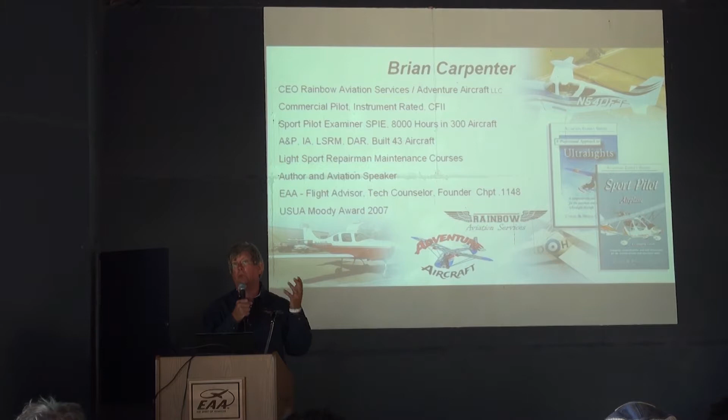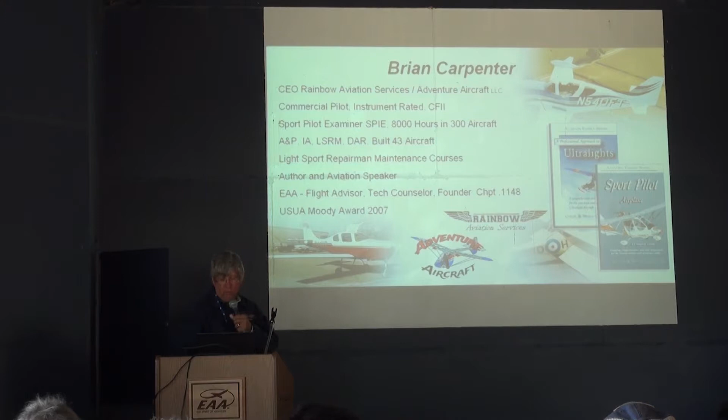We're the company that produces the light sport repairman maintenance classes around the country, with over 4,000 students now having attended that. My wife and I are both authors and aviation speakers, and we talk throughout the country at different events. I'm an EAA flight advisor, tech counselor, and founder of Chapter 1148 in Corning, California, where our home base is. We've been long time involved with EAA, and do everything we can to support them. You may have seen the EAA home builder tips, which I try to participate in as much as I can, and we'll be doing some more of those here if I have any voice left at the end of the show. We're the winners of the USUA Moody Award in 2007 for excellence in ultralights and light sport aircraft.

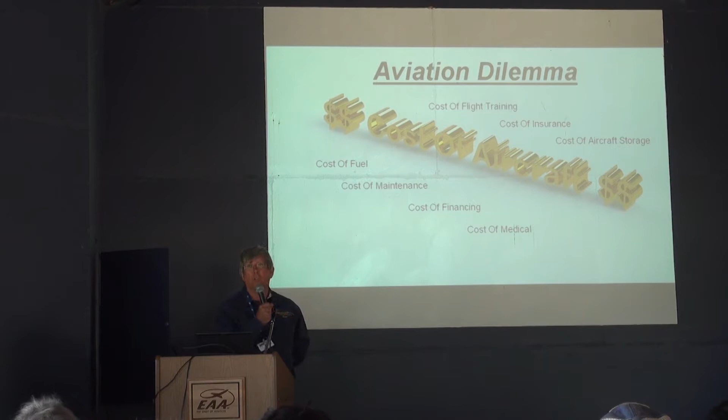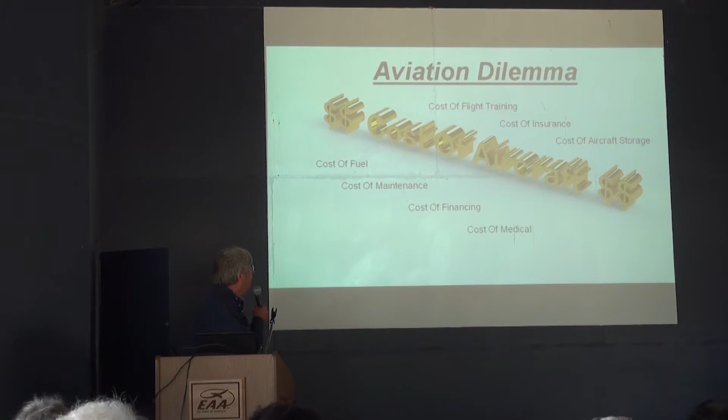So the talk I'm going to talk to you today about is the dilemma that we have in aviation. It seems to be this recurring dilemma, but it's getting worse and worse as time goes on. The cost is getting to the point where it's really almost unattainable for so many people. We have the cost of flight training, cost of insurance, cost of storing an aircraft, cost of fuel, cost of maintenance, cost of financing, cost of retaining your medical, and of course the cost of the aircraft is one of the bigger elements we see all the time.

One of my favorite airplanes here in the whole world, if I could have a light sport airplane of my choice, I'd choose the little Tecnam here. I think it's just one of the most delightful little light sport airplanes we can fly out there. But for most of us, we've decided that $172,500 is not exactly an entry-level price. That's really what we're seeing out there in the industry, is the prices on most of these light sport aircraft are well over $100K. That is not a starting level for most of the people in the world that are trying to get into flying.

And so we've looked at really what we need to do to invigorate aviation, and that invigoration of aviation requires that we have more people involved with that. And if the price of all of these things becomes intangible, they simply don't participate anymore. They just sit on the sidelines and watch everybody else do that.

So when we started down this path of trying to idealize what we think is necessary in order to get more people involved with aviation, we came up with these criteria that we have right here. Now remember, we're not intending to solve all the problems in aviation here, but rather one of the problems, and that's entry-level aviation. So we've thought about this a long time, and we've come up with these 9 items that we think are the most important.

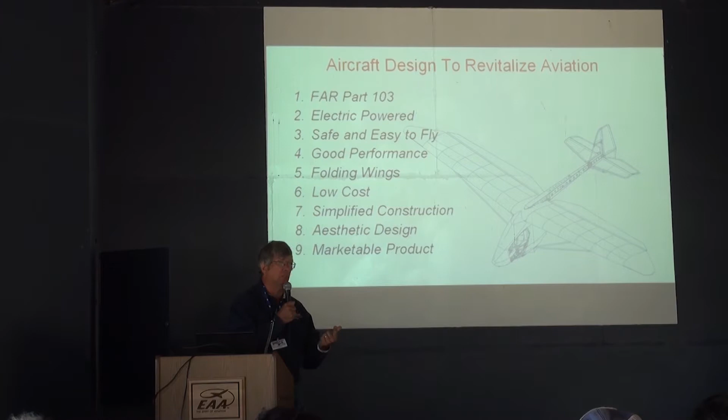First one is that we think revitalizing Part 103 and having just a very basic entry-level way to get involved with aviation, without all of that cost of a check ride and extensive flight training. If all you want to do is go fly around the patch, it really seems, as a student pilot, ridiculous that you need to be learning about ADS-B and how to fly in and out of Class B airspace in San Francisco International. It just doesn't correlate for the average pilot. He simply wants to get out there and fly.

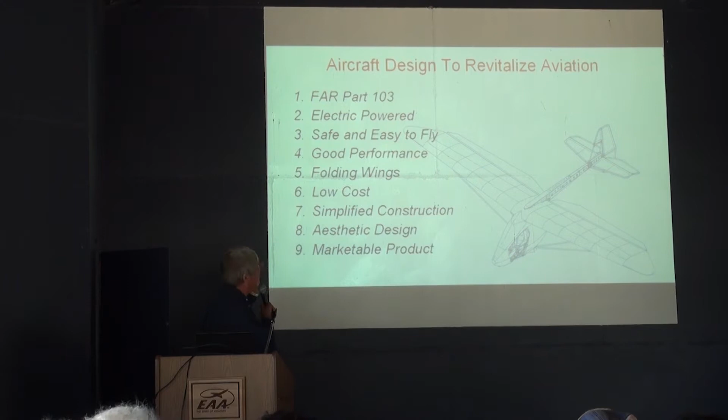Most pilots that start off in Part 103 ultralights eventually end up moving up to sport pilot, private pilot, commercial pilot, and so on. I can't tell you how many of my friends that started with me 40 years ago flying these little airplanes are now flying corporate pilots, flying a Learjet or a Citation. It's all a stepping stone. But if we can't get that first step, it's never going to happen. So we believe Part 103 is one of those answers we're looking for.

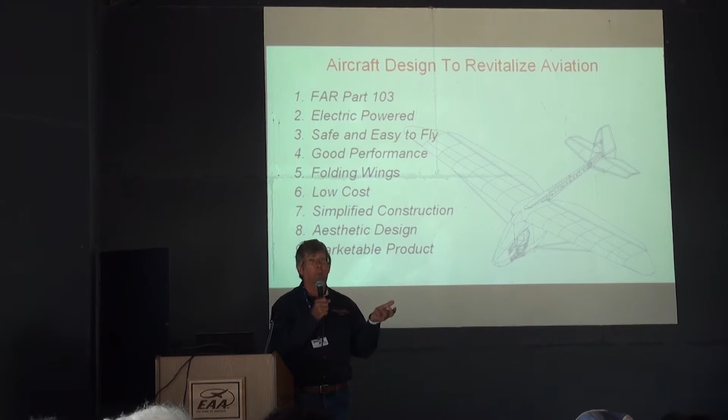We have been looking at this electric power for a long time, and we are truly zealots about this. We have analyzed this inside out. I'll talk a little about where this is now and where it's going. But we believe that in 10 years, especially in the ultralight area, you will see more electric airplanes out there than gas-powered airplanes. We believe we're on the cusp of a significant paradigm shift in how little airplanes are flown.

Safe and easy to fly, good performance, folding wings, low cost, simplified construction, an aesthetic design, and a marketable product. Those are the things that were on our list. I'm going to talk about each one individually.

This was kind of a rendering in the early days of what we thought we were going to have that met all of that criteria.

This is actually a joint venture. Quicksilver Aeronautics, the oldest ultralight company in the world, builds about 20 to 30% of the parts for me. We've been Quicksilver dealers since the very early days, back when we were flying little 15 horsepower Yamaha Quicksilver Model E weight-shift airplanes. We go back with Quicksilver for many, many years.

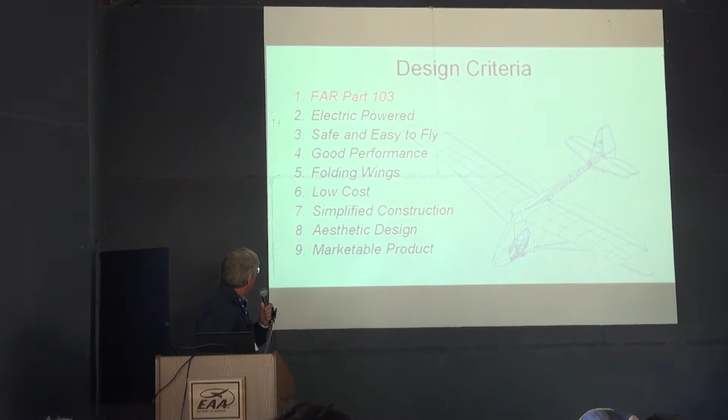So Part 103 — we've decided that's a very important aspect of this. The airplane we have at the show in the ultralight area is a legal Part 103 airplane with a 20 horsepower sustainer motor and 4 battery modules. Without the ballistic parachute, we're exactly at 254 pounds, and with the parachute, a little above that — but that's freebie weight we get on that airplane.

Basic specifications on the airplane: it has a 37-foot wingspan. This was a significant part of the criteria. If the airplane can't fit in a regular 40 by 40 hangar, it would be too much hassle for most people. If you have to fold wings every time you go flying, that becomes unacceptable. So rather than have some high performance glider, we wanted to stick with an airplane that met all of our criteria and could simply fit into a regular 40-foot hangar.

It has 170 square feet of wing area, which gives us a really light wing loading at a 750 pound gross weight, with an aspect ratio of 8.2 and a span loading of 5.5. The span loading is really the criteria that determines whether or not it is a glider.

In electric powered aircraft today, it's not practical to have an electric powered airplane — it is, however, practical to have an electric powered glider. The reason is, if it's an airplane, the FARs say you have to have 30 minutes of reserve fuel on board. Well, that's ridiculous — carrying around 80 pounds of batteries just for that reserve. In a glider, there's no requirement for the 30-minute reserve, so we can use up all the energy stored in the batteries. It's much more practical to go glider at this point, until battery technology catches up to where airplanes really make sense.

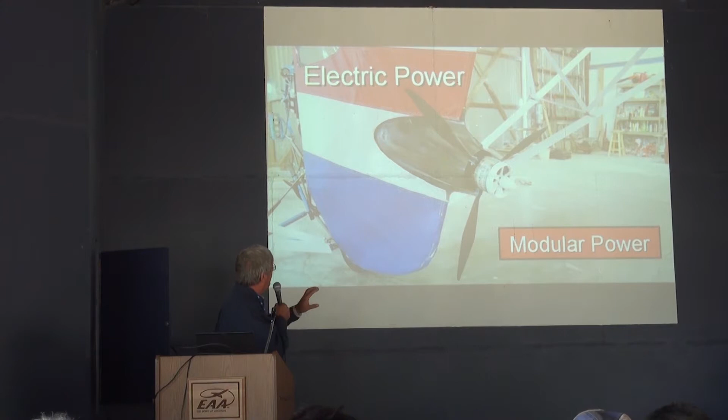Electric power — looking at the future, we can foresee that electric power is going to take over. Right now we're a little simplified: this is a sustainer motor, a Predator 37, a 20 horsepower or 15 kilowatt motor. It puts out 99.3 pounds of static thrust as it sits there. To sustain flight, we carry about 65% power without overheating the motor, in order to maintain level flight.

That's where we are with that motor right today. It's not a self-launcher motor - that would be one of the next versions of the airplanes. Right now we have 3 airplanes: the prototype at the airport that all the flights have been done on, and then production prototype number 2 and number 3. Number 3 is at the show also, and those are getting different versions of different motor power plant packages as we speak.

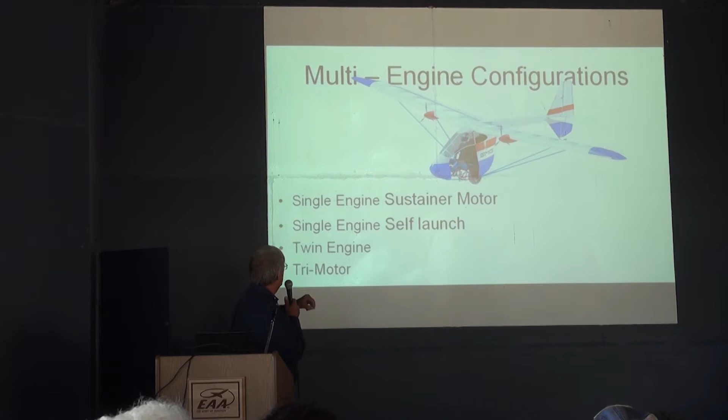The next generation we're looking at is an airplane actually built as a twin engine, a tri-motor, a single engine, or as a pure glider. It can fly in any one of those three categories, and it was designed so that all of the power plant systems are modular. We've recognized that the advancements in technology around electric power right now are changing so rapidly.

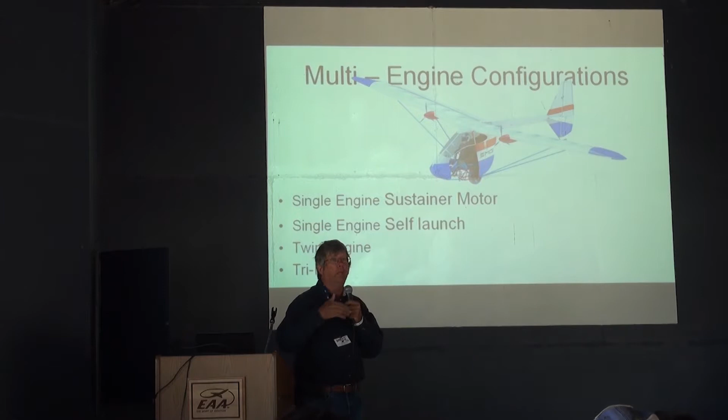It'll be like your laptop - the minute you put down your credit card for your new laptop, they've just put out a new one that's better. It's constantly evolving. We've made the airplane from the beginning able to leverage all this new technology, making it very simple to pull off the old version and put on the newest one. So we expect this to be a modular, changing, evolving system for the next 10 years on a regular basis.

There will be some power plant systems that rise to the top, better than others, kind of like what Rotax has done in the industry. Rotax right now in the light sport industry holds about 85% of the market share. That means 15% is shared by all the other engine manufacturers - Continental, Lycoming, Jabiru, HKS - they all share that 15%.

Rotax, because it got out early and became part of this process, has now absorbed the entire community. It has the best product and can continue to evolve and get better at a faster pace because of its market share. We'll probably see a couple of electric motor developers do that as well.

Here is the Nova 15 and the Nova 30. The Nova 30 is the self-launch motor we'll be using on prototype number 3, the production prototype. It's a 30 kilowatt, or 40 horsepower, engine operating at about 93% efficiency. To give you an example of where we are in the industry right now - 40 horsepower motor, the Nova 30.

The equivalent in a gas-powered engine would be the Rotax 447, also a 40 horsepower engine. This has a third more torque. The Rotax 447 with a gearbox and electric starter weighs 93 pounds. That motor right there weighs 11 pounds. By the time we add cooler, ESC, and all that stuff, we're at 20 pounds - leaving 70 pounds of batteries before I even get to zero fuel weight on the gas motor.

So the advantage we have in electric power: rather than the best gas engines out there, where we're at 1 horsepower per pound - that's the state-of-the-art with gas engines right now - in electric engine development we're really very close to 4 horsepower per pound. A 4-fold increase in power-to-weight ratio coming out of these engines.

The downside is the batteries, of course. So let's go back to our comparison. If we compare those two engines, we have 70 pounds of batteries before we get to zero fuel weight, and then we add gasoline and more batteries to stay equitable, and we eventually get to equitable flight time. Today, right now, that number happens to be right at 23 minutes. So if you're going to fly shorter than 23 minutes, it far outweighs in favor of the electric motor, because you don't even have any gasoline to fly with - it's very easy.

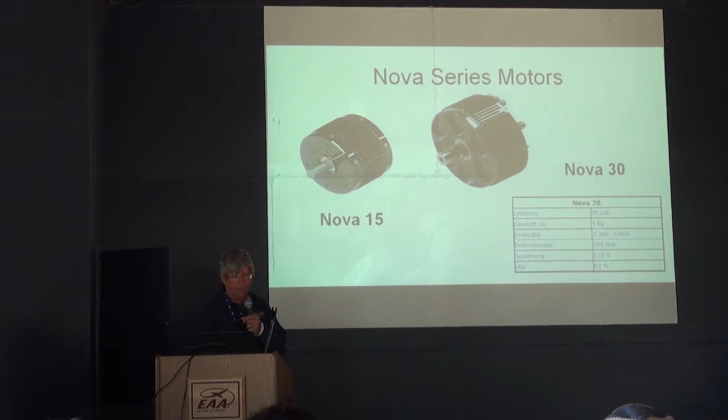When someone says, oh, I want to go fly 3 hours, I just tell them, don't buy this airplane. It's stupid. Right now, 23 minutes is the magic number. We know that you can do better with gasoline for anything more than 23 minutes. If your flight mission is really that you need to go on a 4-hour flight, this is stupid at this point.

As we develop, some of these guys working on this project are really interested in developing some hybrid versions. I've heard some of the craziest stuff in the world - we're going to put a turbine engine in there, driving a generator that charges the batteries, that runs the motors. Okay, let's see what happens. But we really are not interested in being the end source for the motors, controllers, batteries, and all that kind of stuff. We don't have enough volume to do that.

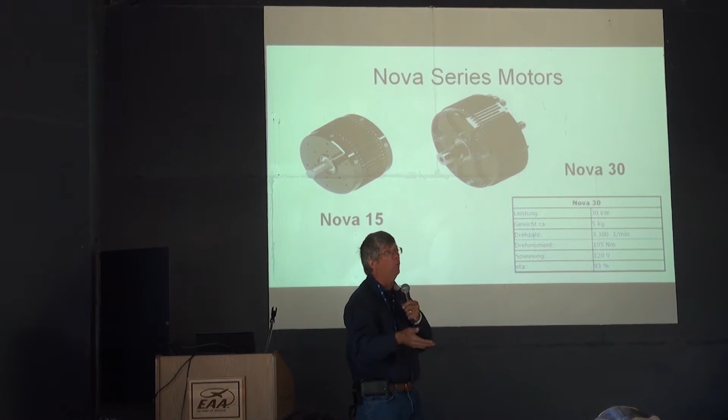We thought it actually was going to be the car industry that was going to drive the battery technology. You know who it turns out is doing more adaptive, innovative research and development towards batteries on the commercialization process? The cordless tool manufacturers. There's just billions of these things being sold around the world. And every Christmas you notice that the battery packs on those drills get smaller and more powerful and last longer. Those guys are really going to town developing that stuff. And I think we will see more and more commercialization. When we get to that point, we'll be able to start leveraging that.

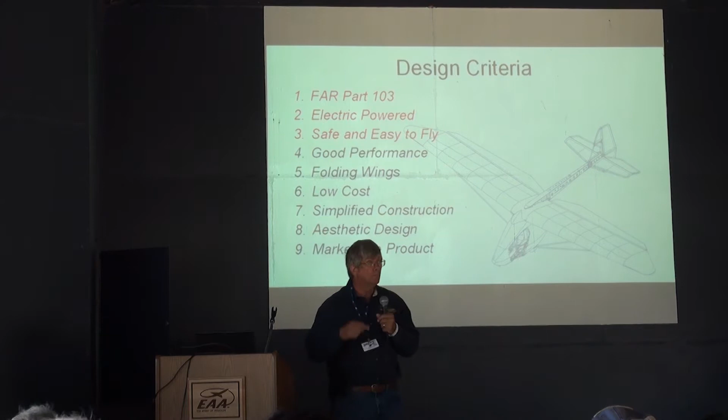Safe and easy to fly. That's never good at an air show. So, safe and easy to fly.

You remember our first criteria is that it had to be Part 103. Part 103 is ultralight, no requirements for pilot's license, no requirements for training, all of that crazy stuff. I grew up in the days when we started training in Part 103 ultralights. It was a transition from power, basically hang gliders that got power, and in the early days there was no such thing as a two-place airplane.

So what we did is we'd get an old Quicksilver Model E weight shift, give them a couple hours of ground school, put them in the airplane and send them off. If they came back, they were a pilot. If they didn't come back, we got a new student. That was kind of how the system worked.

Well, that's really not an acceptable method by which to transition pilots into ultralight aircraft. So one of the criteria on the airplane is that it had to be a really easy to fly, safe airplane. As a result, we have to give up some of the high performance—the snap rolls in this airplane are probably going to be kind of wimpy. We're really looking at stability, ease of flight, and safety.

This was test flight number 39, specifically for the purpose of demonstrating the hands-off flight capability of the aircraft. We've got a camera plane flying out in the distance, getting prepped to do some filming.

It's kind of funny because they flew along as I took off, and they're climbing at max rate of climb right now. When we tow, we typically tow at 40 miles an hour, and we can be towing right at 1,500 feet as a routine. Our highest tow rates right now have been 1,800 feet a minute on the tow—very aggressive.

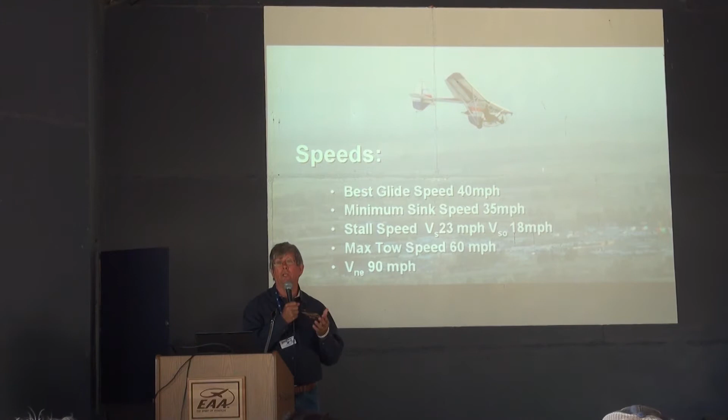Now, at best glide speed, the glide ratio is 13 to 1. The glider guys all say 13 to 1, that's pretty horrible—that's not that great. That's actually right about in the area of an intermediate hang glider.

But what you have to remember is that glide ratio is distance over altitude lost. If you're going somewhere, glide ratio is really, really important. That's why those guys with those fast fiberglass gliders do those long cross countries. Very efficient, real high glide ratios on the thing.

The most important thing for this airplane is not best glide, but rather minimum sink. And we're right at 280 feet minimum sink right now. That's better than the Schweizer 2-33. That's the kind of airplane where you can now thermal really efficiently. And as you saw in the video, the glide is really, really flat on that thing. It's not coming out of the sky very fast.

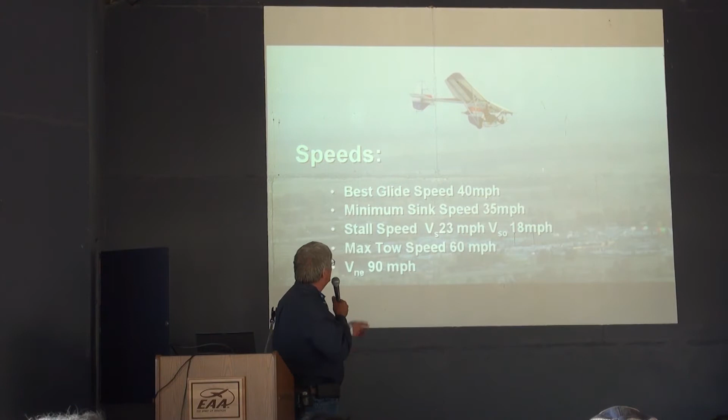And so one of the guys said, well, we really need a higher glide ratio. And he was in the booth talking to me, and I said, well, it's actually 80 to 1. He said, that is not 80 to 1. There's no way to get 80 to 1 out of that. He says, yeah, I do all the time. He says, that will not get 80 to 1. You start to get a little indignant. And I said, I do it all the time. He says, how is that possible? I said, all I do is I reach down with that little thumb switch and start adding a little of that electric power, and the indicator just goes right on up to 80 to 1 as soon as I get that throttle pushed up enough. I can make this thing act like any kind of glider as long as you've got a little supplemental power there to back you up.

And so it was kind of tongue-in-cheek, but the reality is, when we're using this as a glider, just a little bit of power really improves the performance. And so right now, even with our small battery pack, in a sustainer mode with no lift, no thermals, we're still about 20 minutes of flight time in the air.

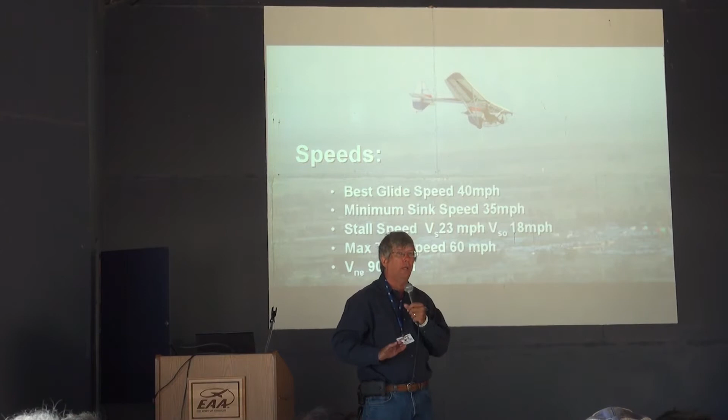That's a long time. So I heard like Malcolm at Wallaby Ranch, where they tow the hang gliders down there. And he was saying really what we need in the industry is we've got all these guys that are towing behind the Moyes Dragonfly. We tow them to 3,000 feet, they catch the thermals, and they fly around for a couple of hours before they come home. But we've got all these old guys, their landing gear are not as good as they were when they were 19 years old, and the thought of landing on your feet at 80 years old just doesn't work for them anymore. If we've got an airplane here with wheels where we can take off on wheels and land on wheels, those old guys that no longer can do the hang glider stuff can participate this with other.

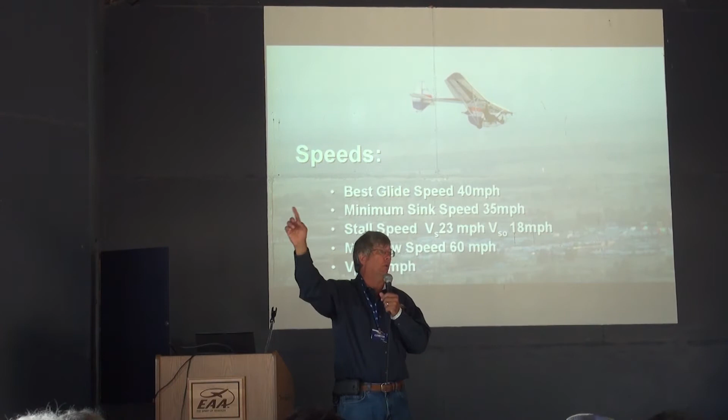And he says, I don't even need 20 minutes, I need 10 minutes worth of flight time on the motor, because we're going to tow them up, they're going to do 2 hours worth of thermaling. All we need is have a little supplemental power that if they get a little short on approach, just add a little power. Or if they're out seeking a thermal a lot further than they should be from the airport, power up and go back to the landing area. So that's their goal. They don't even want to think of the power, the electric power part of the whole thing as part of the equation. It's basically to them a backup system to the flying of the airplane. So many different missions that this aircraft can be in.

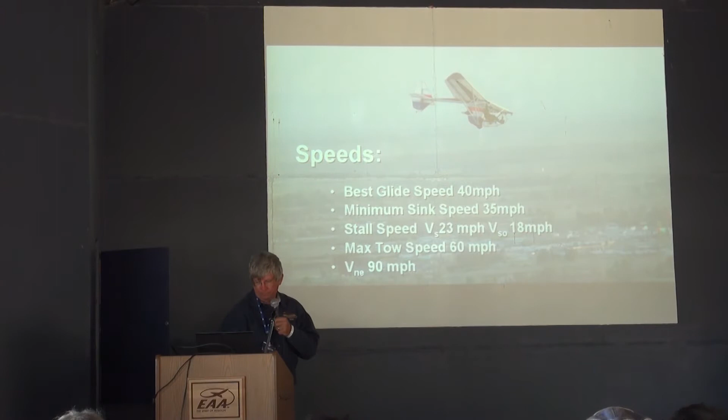So Austin is my shop manager's 14-year-old, and I started having him run the wings. And as you saw in the video, I didn't realize that he was just holding on until I took off and he just let go of me. And so now we're at the point where we realize finally that we don't need any help on the wing runner. As long as there's no wind, just put our feet out and go. So pretty short takeoff and landing distances on this thing if we want to. By the time we're about 10 feet, got total control on the airplane.

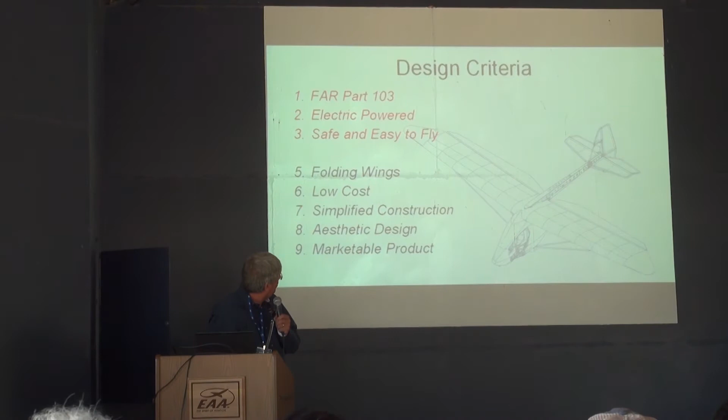Yeah, I talked about the glide ratio and the sink rate.

So are you ready to run, Carl?

On board the aircraft are 3 flight data recorders. We have the Asset Vario, which is basically a handheld variometer that gives us a whole bunch of downloadable data, GPS position, all of that kind of stuff. We have an Eagle Tree flight data recorder that does engine and battery temps, motor temps, and all of that kind of stuff. And then we have an ESC that's doing controller motor temps as well. So we've got 3 sources of data that we're downloading.

Occasionally on the website you will see Daniel, our motor guy—I'll introduce you to him at the end here for questions. He compiles all of our data for us and outputs this stuff, and you can see the actual data plots coming out of the flight data recorders on the airplane.

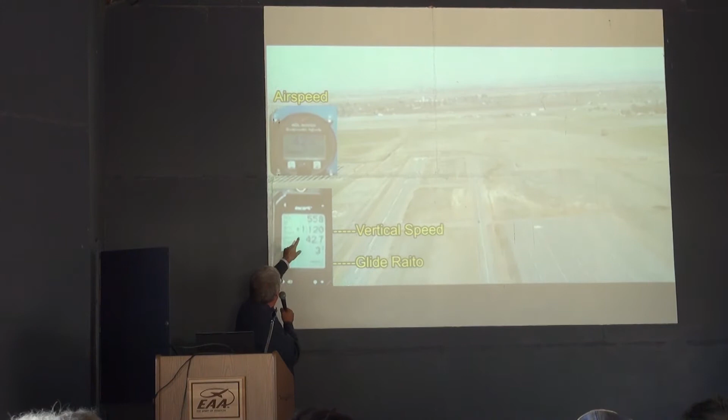So what we've done on this flight is we're showing rate of climb over here. Right now we're about 1,200 feet a minute rate of climb, glide ratio, altitude, GPS tracking position, and then airspeed up there on the left-hand side with digital airspeed. We've got digital airspeed and altitude, actually about 20 functions in those instruments.

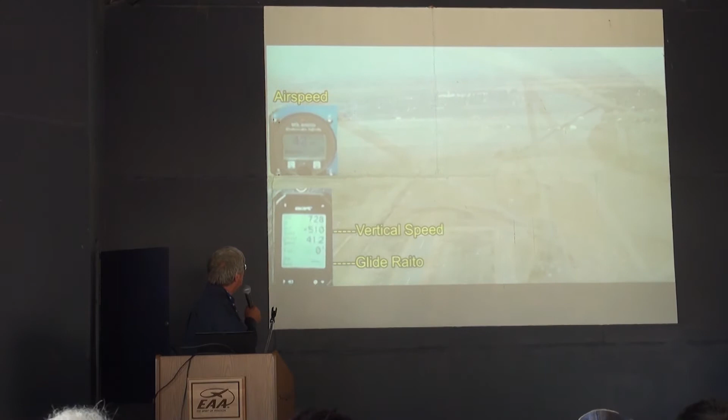So we tow to altitude. On this flight right here, we're 300 feet above sea level, and you can see that we're dropping off right about 890 or so. That's about 600 feet above the ground for that launch right there. So we're at the end of the runway and we cut loose at 600 feet AGL.

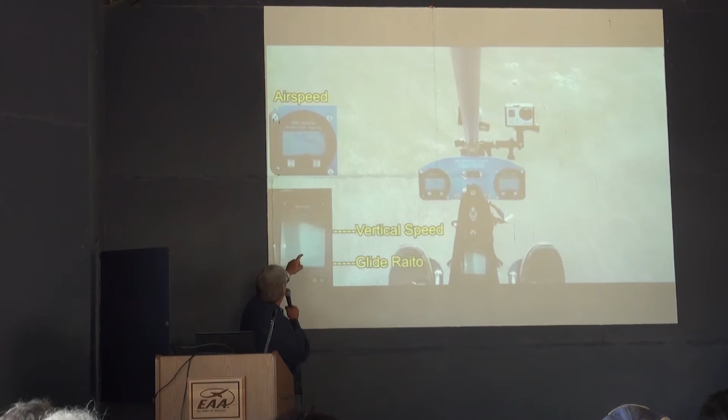Normally that's a pretty short flight for a glider, 600 feet to make a flight around the patch. So you can look, on occasion when the video gets good enough, at the glide ratio right here. This video is on the YouTube channel also, so you can go scrutinize our data that we've got right here, and vertical speed over there.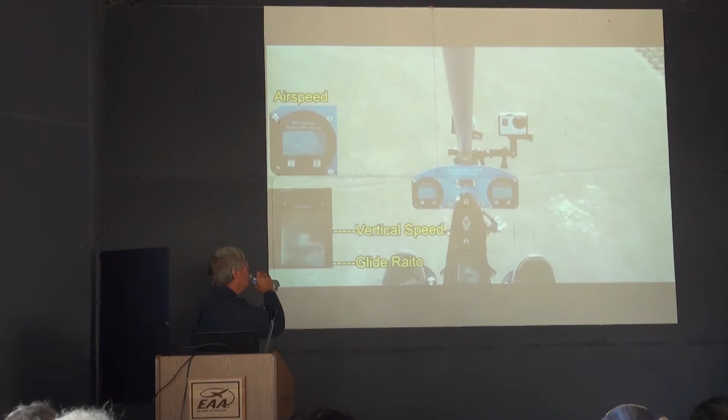So we're able to take off from the end of the runway. We're right now coming alongside of the runway. We will fly down past the end of the runway over the high school, make a 360-degree turn, and land in exactly the same spot that we took off from.

These are all glider tows. The first 50 flights on the airplane were all ground launch, and we didn't do any power stuff until just recently. We've done 5 powered flights so far. Every flight that we've done so far is all flight test program stuff. We've got a very specific series of tests that we're doing, and we're just knocking them out one at a time—a very, very specific program flight test on the thing.

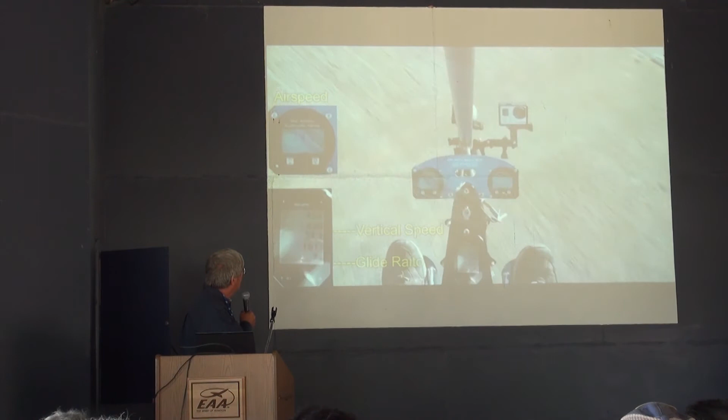Yeah, it doesn't show up too good on this screen right here, but now we're getting ready for the landing, starting to circle down. Very easy to fly, very fun to fly.

On the website we also do a progress log. So we keep you, when we're in the shop, updated pretty closely on a daily basis of what's been happening, all the flight test stuff. We show the bloopers from the screw-ups on the flights and the screw-ups in the shop—pretty much everything that's going on within the shop.

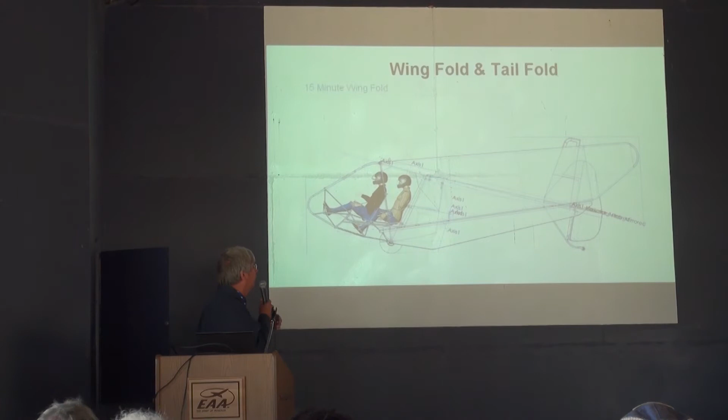Folding wings—the airplane has a very unique folding wing design. It's designed so that the entire package can fold up; the tail folds up, and none of the controls on the tail have to be disconnected to fold—they just simply fold. The wings fold down alongside the airplane. When the airplane is folded, with the wings in the folded position, the total width of the airplane at the widest point, with the exception of the training wheels here, is 33 inches. It's a very, very narrow package.

It will go through a door of a house—through a regular house door in a folded position. That was one of the criteria. The ability to afford an aircraft means I've got to have some place to put this thing. I've got to be able to either slide it in the hangar with my buddy without using up too much of his space, or take it home and put it in my one-car garage. That was one of the criteria right from the very beginning.

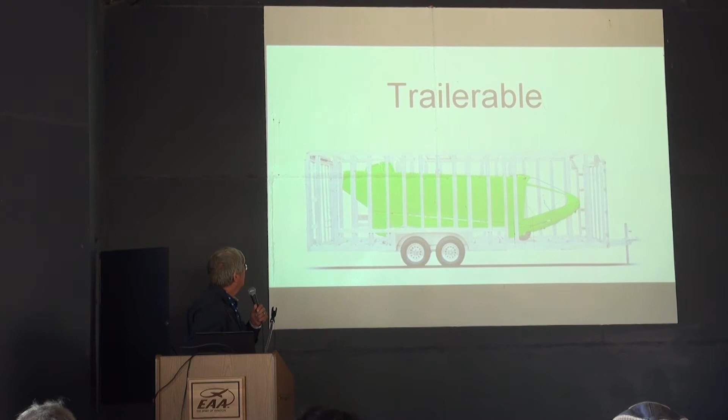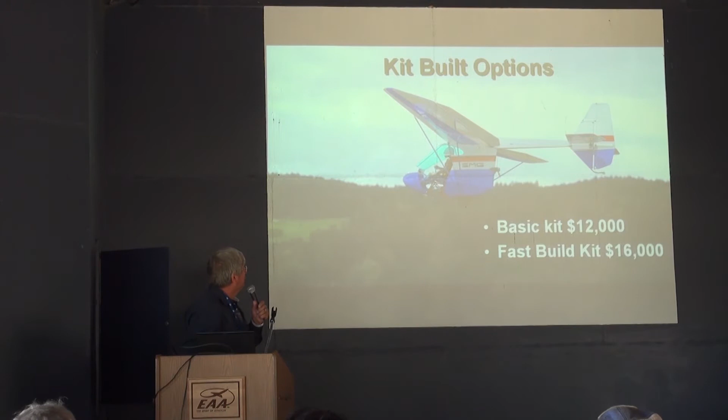We need it to be trailerable. Low cost: the plans-build option we think we can do for less than $10,000. We've got a couple guys that are started on that already. Kit build, $12,000—you've got to do a little welding—and the fast build is basically an erector set at that point. Simplified construction: we've done some amazing things with the construction of this thing. The entire airplane is designed using SolidWorks with full 3D modeling, finite element analysis capability.

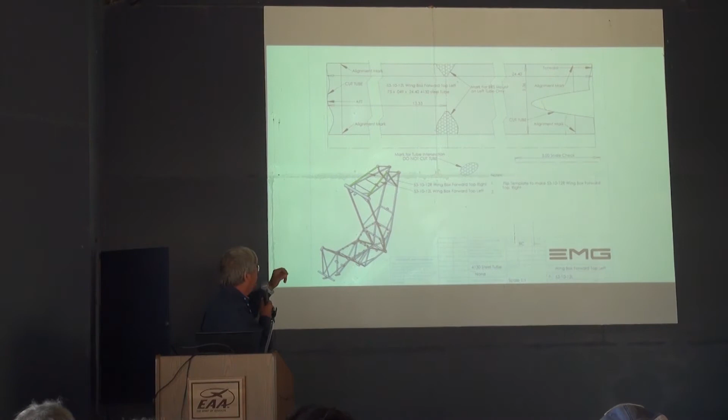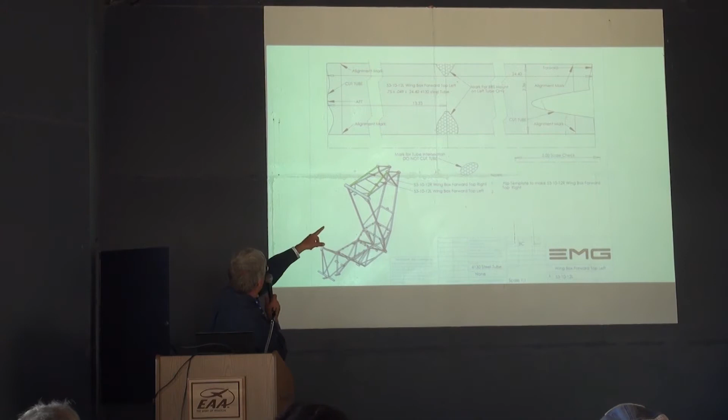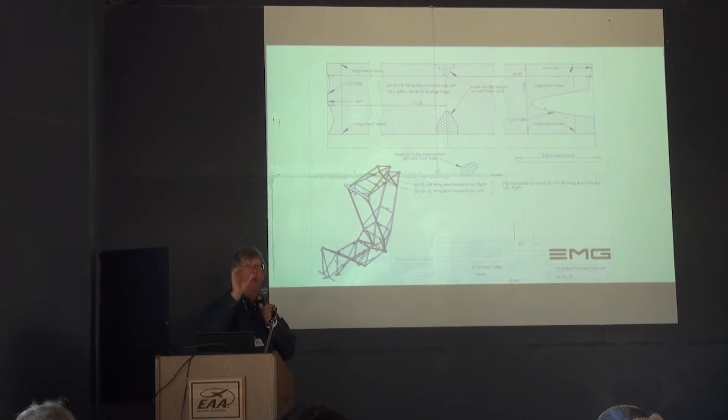Each one of the tubes has a set of plans for a plans-built version that points to the tube. On your home computer, you simply print this out at 100% scale, cut out the template, and cut the tube to length. In this case, the tube is 24.4 inches long. We draw a line down the center of the tube, usually using a U channel to align it perfectly straight with a magic marker. Wrap the tube with the template, slide it to one end, mark it, slide to the other end, mark it, then grind it on the grinder.

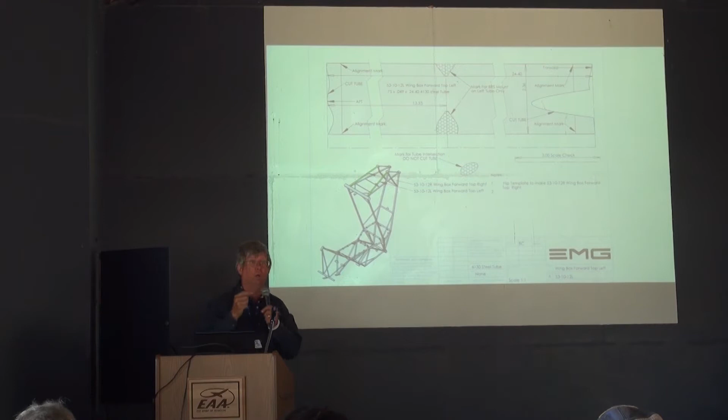It fits the airplane exactly perfect. If you've ever done tube welding, you grind a little, go fit, grind a little, go fit, and by the time you're done and ready to weld, there's this big half-inch gap you're trying to fill with the torch.

This is just amazing. The 3 prototypes we have right now were all built using this system to prove that it works. We even have jigs that can be built to hold all of the frame members in place. Those jigs are actually made out of MDF.

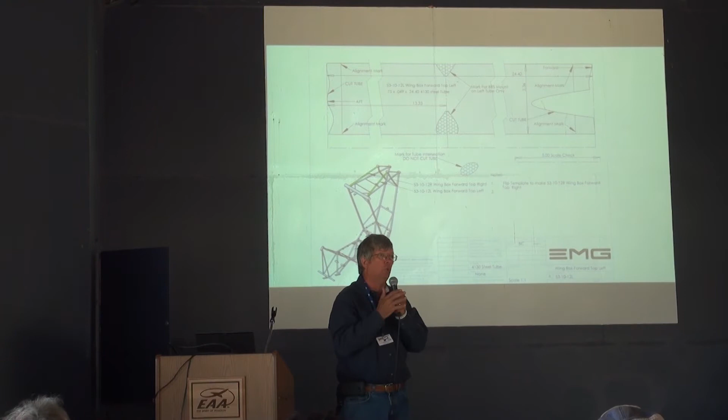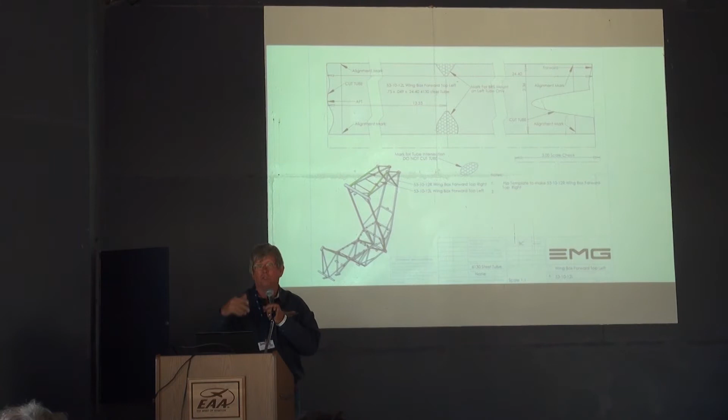We have DXF files that you can take down to your cabinet shop, give them the DXF file and 2 sheets of MDF, and they will cut all the jigs. It usually costs about $200 for a complete set of jigs. The jigs can be used probably about 50 times, so we've got guys who will make all the jigs and then sell them to somebody else for 3/4 of the cost, get their money back, and the next guy can buy them and sell them for 3/4 of the cost, and so on. Make use of many jigs on there.

There's an example of the MDF jigs for the wing box, one of the more complex parts in there.

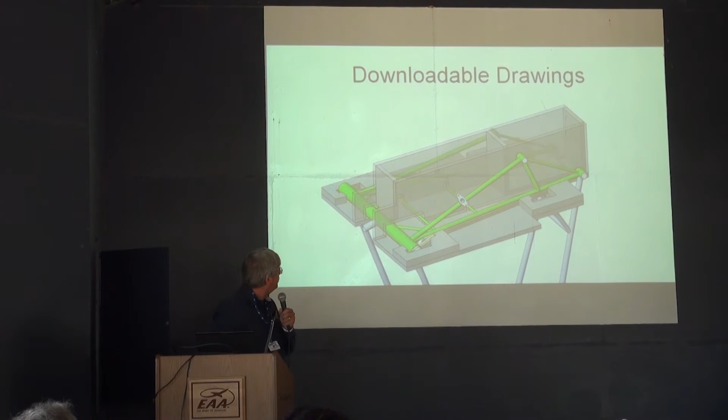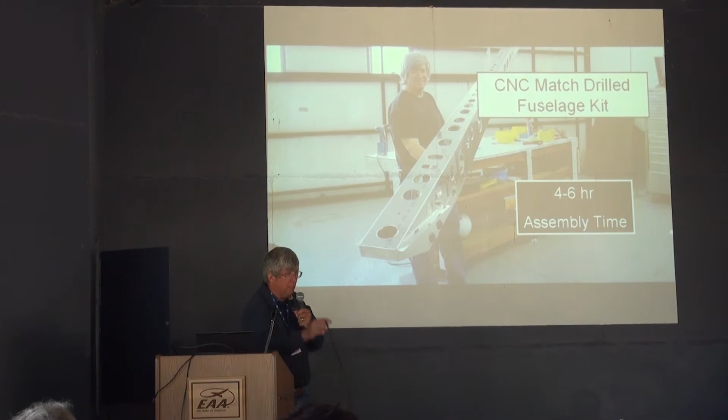The fuselage is 2024 T3 match-drilled aluminum. It's simply pop riveted together with stainless steel pop rivets. We haven't done it yet because we have Clecos, but we designed it with the intent that you don't even need Clecos — it's such a close, nice fit. You just simply start pop riveting parts together and it all lines up perfectly.

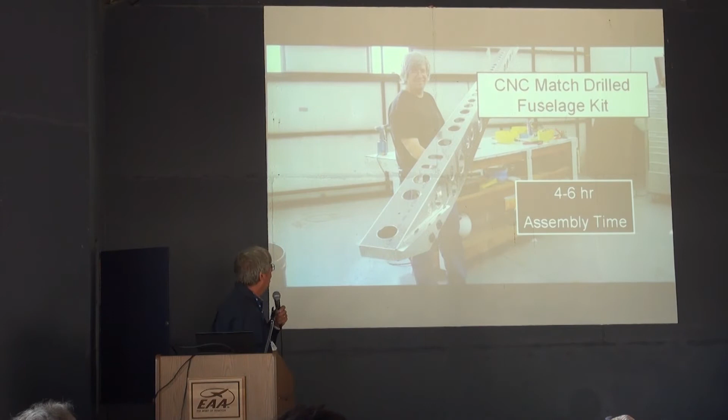It's just amazing. The last boom fuselage that Jason put together took 4 hours start to finish — just start popping it together, with a little bit of deburring on the holes.

Simple, proven design. The wing is actually a slightly modified Quicksilver GT400 wing from Quicksilver. We're using all of their fittings and all of the engineering from the original GT400. We've got slightly stronger spars than what they had, but on the ultralight version we're sticking with the same spar size as the original GT400.

Aesthetic design, we really like it. We have all the molds right now for the carbon fiber fairings, the windshield, and all of that stuff, though we don't have it on the prototypes at the show yet. We still have some work to do in that area.

The airplane is designed as a single engine, twin engine, or tri-motor configuration. The nice thing about electric power is you can do distributed power easily — because the motor's only 5 pounds, you can put it out and power it in a remote location. That's why you see new technologies where guys use 16 electric motors to fly, or that little eVolo helicopter with little motors all over it in order to fly.

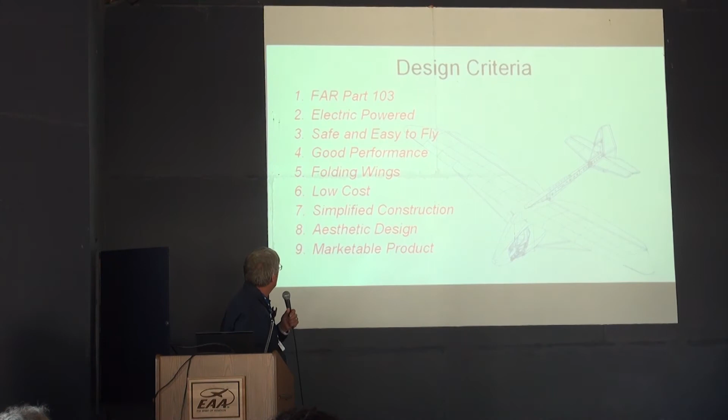Marketable product, of course — if we can't make any money... This project right now, I keep telling everybody, it's kind of like if you had a fire hose shooting $100 bills. That's what it feels like doing this project. It'll discourage you at times.

Right now, most people aren't aware that the operating limitations in SLSA and ELSA light sport aircraft include the ability to use that aircraft for towing for hire. Your experimental light sport aircraft can be used commercially, charged for the use of that airplane to tow gliders aloft — it's right in the operating limitations. It was one of the little caveats that came about in the whole rulemaking because we had all of these Moyes Dragonflies towing hang gliders and they wanted to allow that to continue. We've never seen this done very much except in the hang glider community because we haven't had any of these type of gliders before, and we've never seen any other aircraft used for this, because the only aircraft really effective for towing hang gliders — flying slow enough for a hang glider on tow — is the Moyes Dragonfly.

Well, now we're talking about a glider with a tow speed of 60 miles an hour. Pretty much any light sport airplane you've got out there is perfect for towing these things along. So now we can envision where we have a little flight school set up.

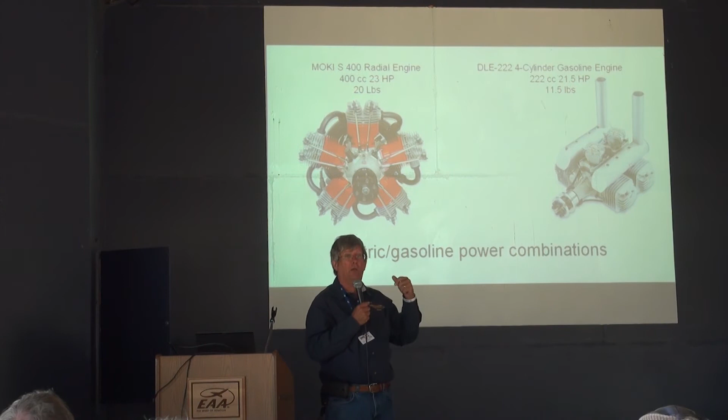The airplane is totally capable of flying with some reciprocating engines. Our passion is towards the electric, but we've got a couple of guys. The guy that's got my biggest attention would like to put two of these radial engines on it. There's a couple different radial engines out there, from the model airplane industry, 23 horsepower each, one on each wing. If you listen to them in the models on YouTube, they just sound like a little miniature Pratt & Whitney. It's really cool sounding, and he's got my attention. I actually kind of like it, two-engine radial powered. I think that'd be awesome. So we may see some of these other guys developing some of these power plants as well.

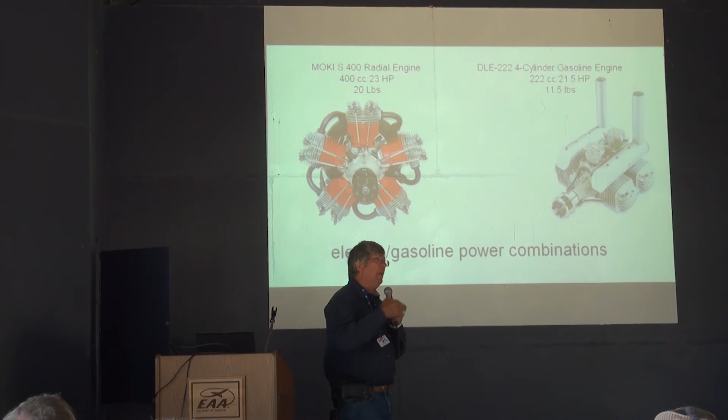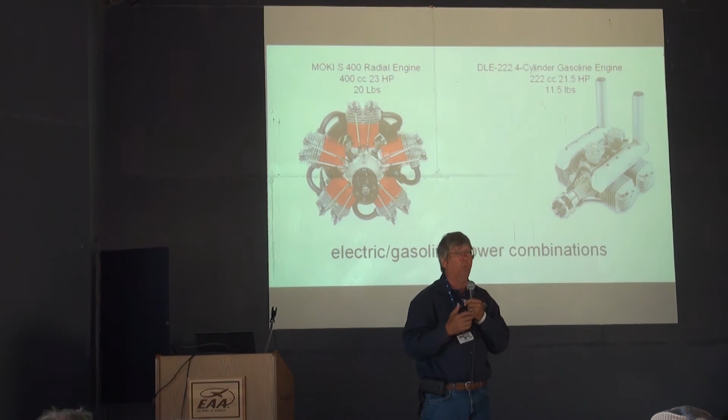The way we are working the power plant system is we are working with other manufacturers that want to be power plant manufacturers for this type of aircraft, and we will take their product, put it on the airplane, flight test it, and advertise it. That's a really big advantage to them.

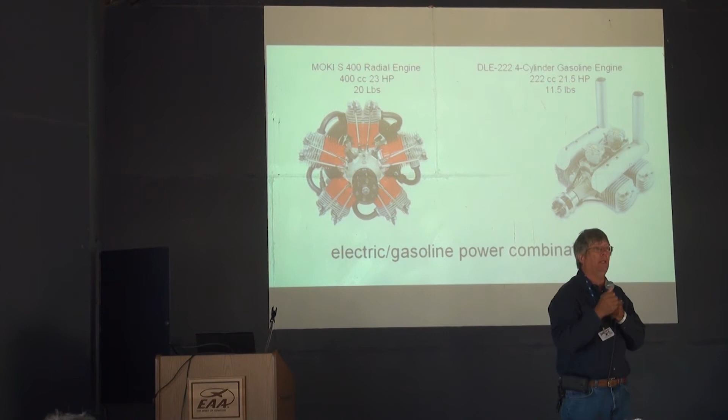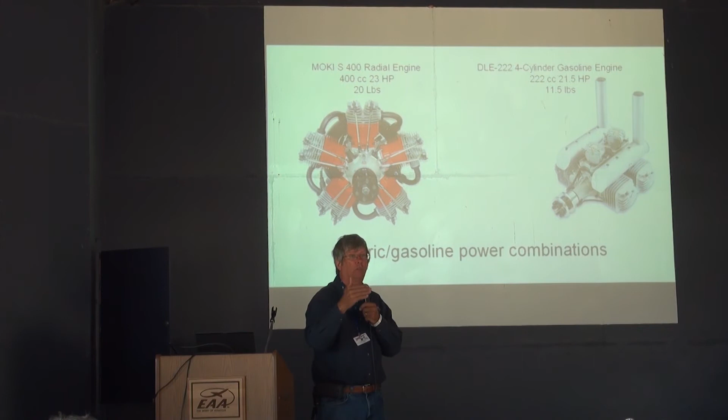Our website right now, on a very consistent basis, is a million hits a month. We get a lot of traffic through our website, a lot of people interested in this, a lot of foreign interest in this stuff. So for these manufacturers that want to play, we're not going to do R&D for them. We're not going to buy their product, put it on the airplane, and see if we can make it work. If they want to play, they'll give us a motor that we can use. We'll put it on - if it blows up, that's on them. But I've been around this show for a long time. I know how much time it takes to get a product really well developed. I'm not going to pay for their R&D. They can pay for their own R&D. I'm willing to help them.

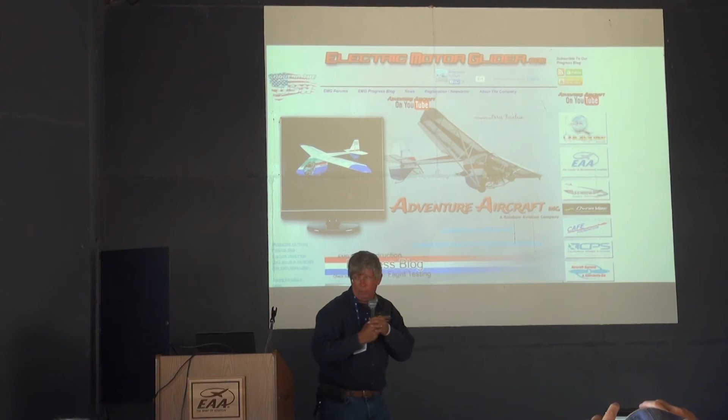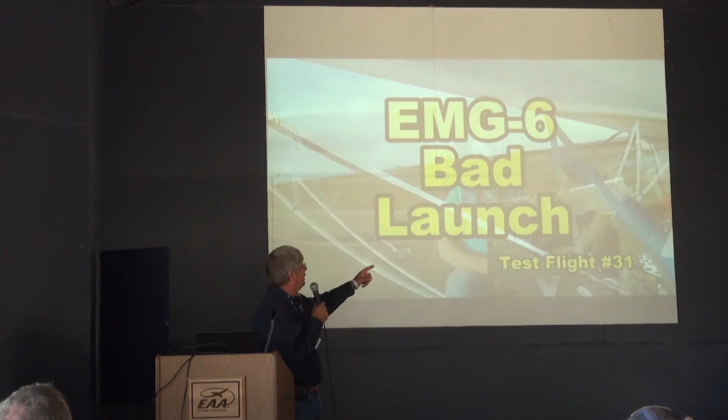What's this one? Oh no. This was test flight 31. We got a dipstick at the airport, Carl, our buddy - he was going to help me. He wanted to help launch the airplane, so he's on the wingtip out here. I forgot to tell him it's important to let go. I thought he knew that. So now I'm off to the side, finally recovered. My rope is now underneath one of these reflectors, and it shoots the reflector up into outer space. Everything went fine after that, but I now explained to my wing runners that when we get up around Mach 2, just go ahead and let go. So it didn't work very well. The rest of the flight was pretty uneventful, but...